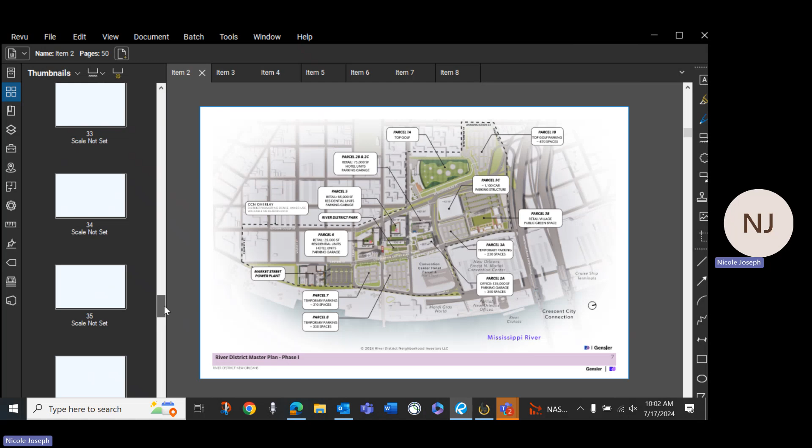This was in last month's presentation, showing the existing convention center promenade at the convention center and how we're trying to continue that promenade across the Riverside parcels of Convention Center Boulevard, down through the River District, and hopefully extending all the way to the power plant. Let's go to the next slide.

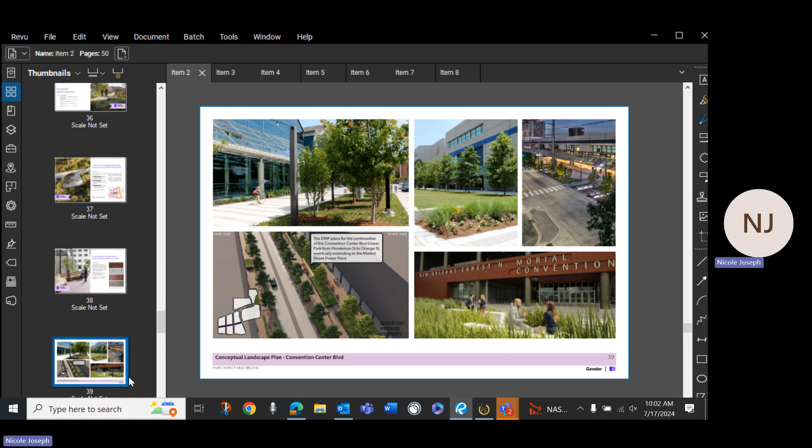This starts to delineate that a little bit more. We were asked to show this because we don't necessarily know specifically what's going on in each parcel. We have a general idea of a conceptual plan, but it really depends on what developers come in to do for each individual parcel, so we provided conceptual plans.

For example, in the top right, that's looking at Convention Center Boulevard between Henderson and Euterpe. We have a 72-foot right of way, and on the lake side of Convention Center Boulevard, a maximum setback of 25 feet and 15-foot minimum, which is what the office building is providing. You can see the office building as the small white box in the top left corner. On the riverside, where we're trying to continue the promenade, there's a minimum setback of 30 feet and maximum setback of 50 feet.

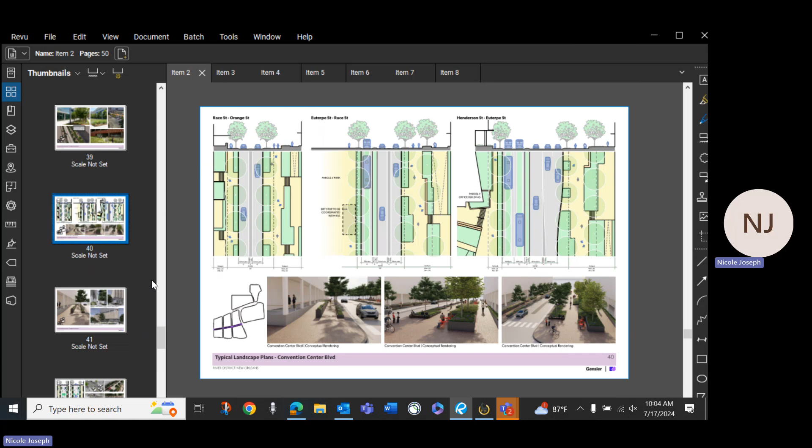You can see that continuing in the second diagram in the middle, on the riverside between Euterpe and Race, and then continuing in the last diagram with the same 30 to 50 foot setback from Race to Orange Street. I want to go to slide 42.

So this is looking at Race Street and Euterpe Street. Again, these are typical plans. Obviously with Euterpe, we know what's happening with part of it, with parcel 2A where the office building is. But again, trying to show the conceptual plan, working with Wes Michaels and SMM on developing these.

To show what we're planning for throughout the district. Where we have parallel parking, shared lanes on the river side of Convention Center Boulevard. We have a BRT lane because the BRT will route down from the overpass, down and around in front of parcel 2A, in front of parcel 5 where the park is, and then around and back up to downtown or across the West Bank. You can see the shared lanes there as well.

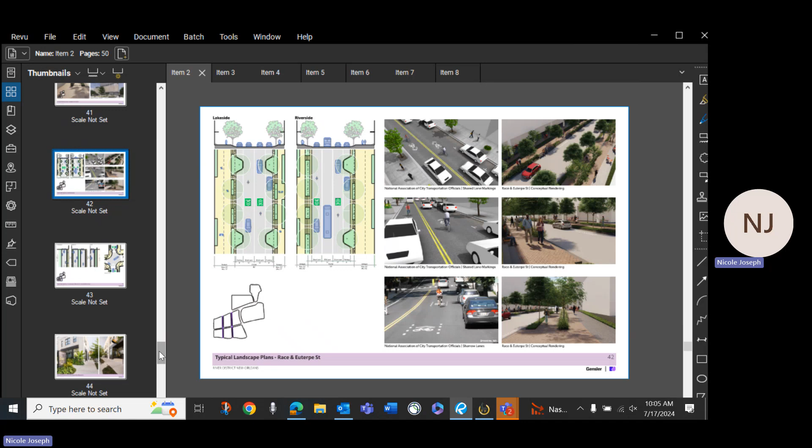We want to jump to slide 43. This is looking at the outskirts streets. So you have Tchoupitoulas on the left and Henderson in the middle, and then Front Street on the right. Most of these are determined. Henderson was already determined that we're not making adjustments to that, maintaining the same right of ways that DPW has had previously. Same with CHOP.

And then with Front Street, we worked in coordination with the U.S. Army Corps of Engineers to determine their setbacks required for the wall, and then providing more of a service lane on Front Street, so that for different loading for those parcels on the river side of Convention Center Boulevard.

We were also asked to look at a typical intersection, which is on the top right, to show where crosswalks are, to ensure that we're providing ADA accessibility. So we have the ramps for those.

And then here we see the shared lanes. This is, for example, at the intersection of Convention Center and Race Street. So you have the shared lane of Race Street, the bike lanes, and then you have the BRT routing down and around, which is going in between parcels 7 and 8 on the bottom. So that's really the only adjustments we made to the presentation from last month, trying to provide additional information.

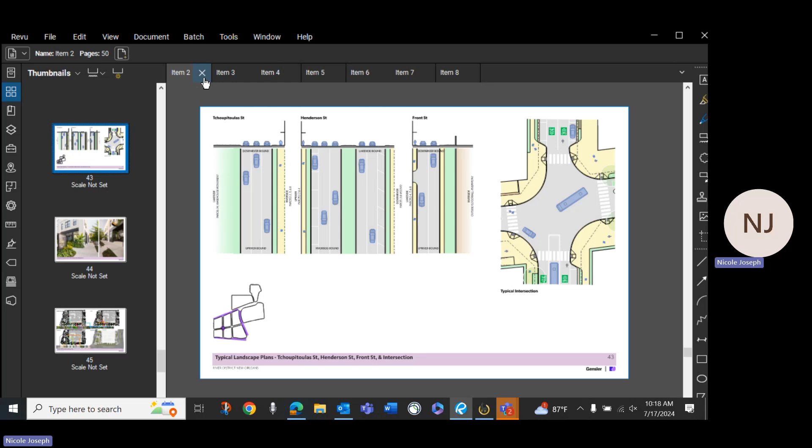Okay, so the next item on today's agenda is consideration of Design Review 624. We have Sarah as the map person, and she'll give a brief presentation, and then the applicant will have 10 minutes to present.

Yes, can you switch to item 3, please? Actually, can you go to page 25? Thank you. Were they submitted? Actually, a few weeks ago? We received them July 6th, I believe. Like the 3rd. July 3rd. So in the agenda link, to the page.

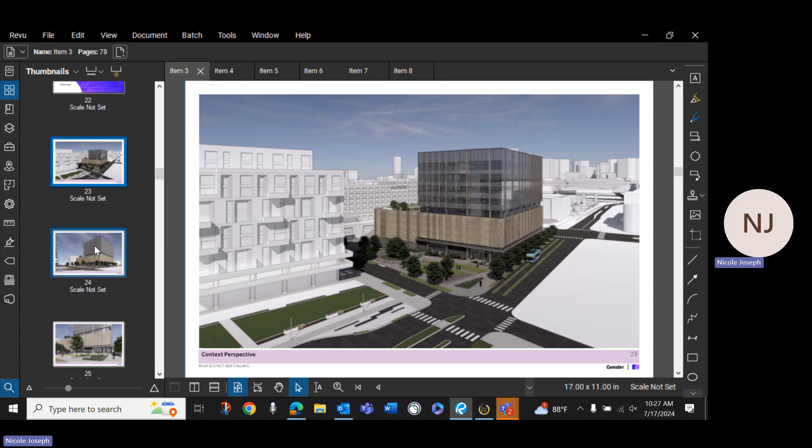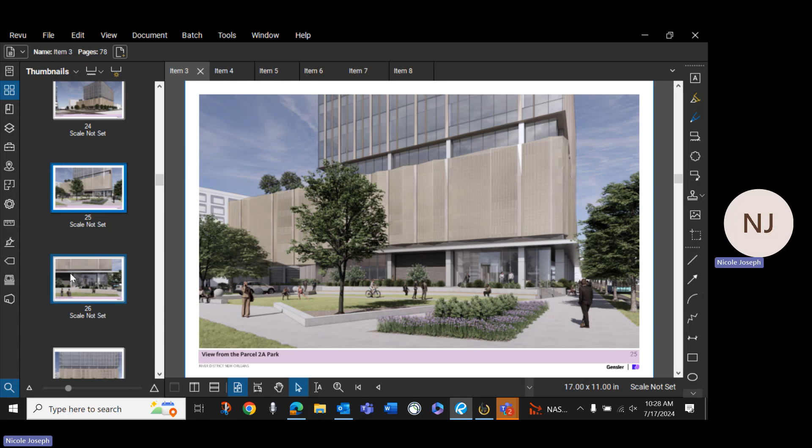The other comments we tried to address regarding the design characteristics of the building: there was concern that the building felt too contemporary for New Orleans, concern about the amount of glass not feeling as much New Orleans as past precedents, a comment about it feeling too glamorous for the River District, and concern over the original design of the garage screens feeling flat and lacking texture.

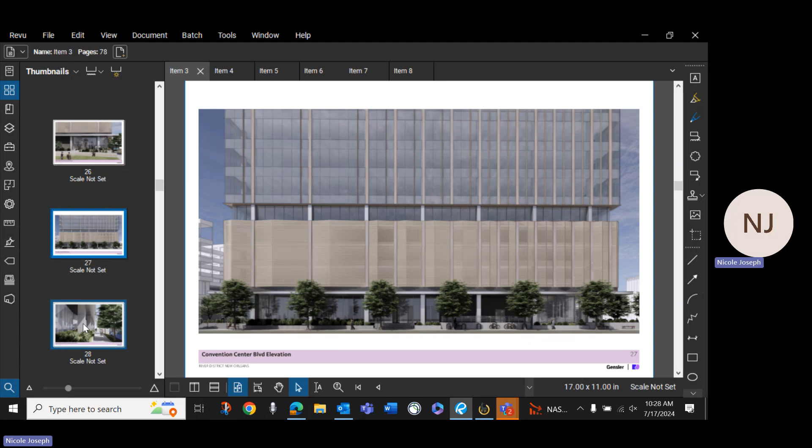I think a lot of that had to do with the way the renderings and the distances they were shown from the building felt very flat with no texture. So what we tried to address with those comments was new renderings that really illustrate getting closer to the building, and we've brought samples of what that material is like for screening the garage.

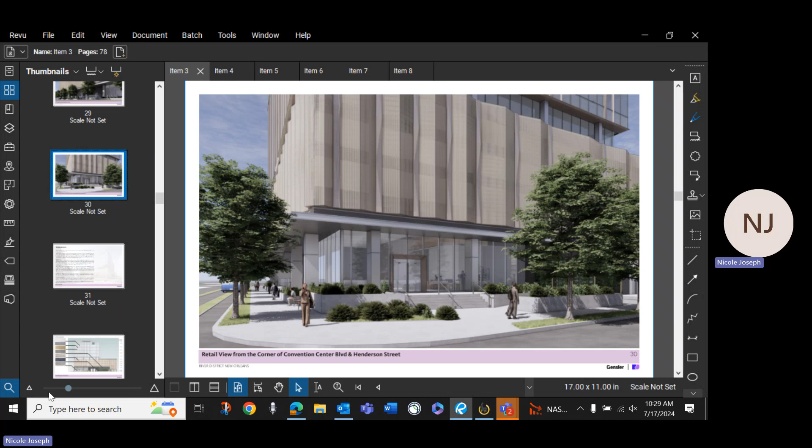In order to address the flat aspect of the parking garage, one of the things we looked at, and ran past the manufacturers of the product, was whether there's a way instead of having it be flat, to have it move and pick up on some of the themes of the building above. So we've gone through the garage design and redesigned it to actually have movement.

This slide is also part of a new section in which we provide precedent studies of the river district, the current context. We also show the immediate context of the future, specifically around where parcel 2A is going to be located, with additions to the convention center being proposed and planned by other architects, as well as directly adjacent across the street to the museum being proposed by EDR here in New Orleans.

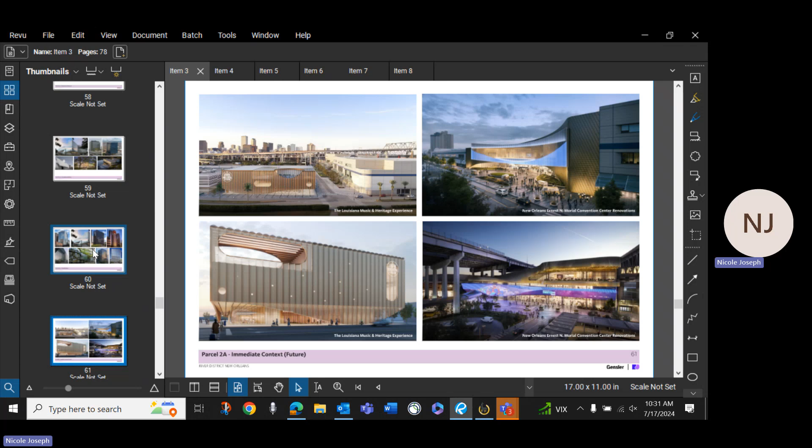There's also a section on glazed buildings within New Orleans where we feel that, while it isn't a huge typology, there are precedents within the city that are predominantly glass, from more modern and postmodern to more contemporary, particularly some of the new buildings like on Tulane's campus. So within this we've provided different precedents.

And then at the end there are also precedent examples which the development team has referenced and looked at from previous cities that have done successful developments like this. Those two being the District Wharf in Washington, D.C., which has this blend of rustic and modern warehouse-type buildings and more contemporary office buildings, and the other precedent is the Seaport District in Boston, which is again a very similar concept.

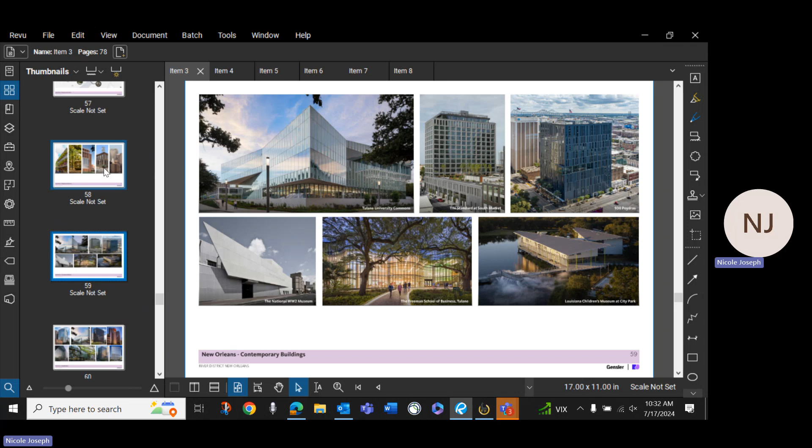So we've provided all these different examples as an addendum at the end of the package, and hopefully that explains our point of view for the district.

We were under 10 minutes. But thank you.

I would open it up to committee discussion, and one thing I'm not sure you kind of pointed on was some changes to the upper floors to kind of add some banding.

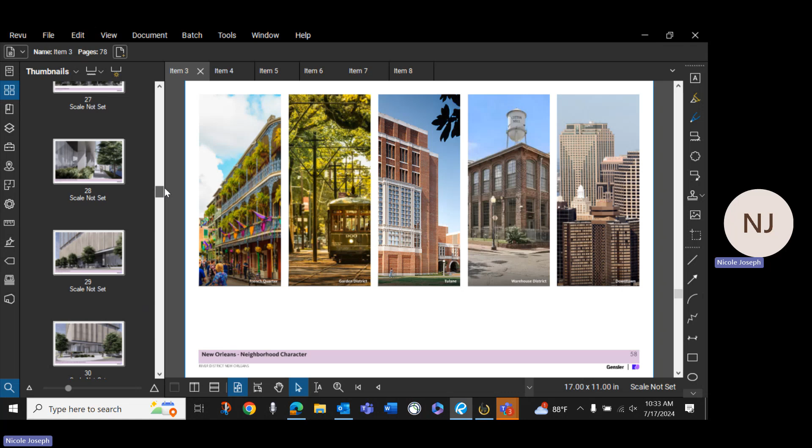There's nothing, we haven't really adjusted the upper floors, but there is a slide that speaks to our interpretation of what was driven by the design guidelines and how we feel like we meet the intent. With an office building, a Class A office building, the market is really looking for flexible design, and the glass box gives you the most flexible. There is a little bit of articulation, materiality, and decorative elements to it.

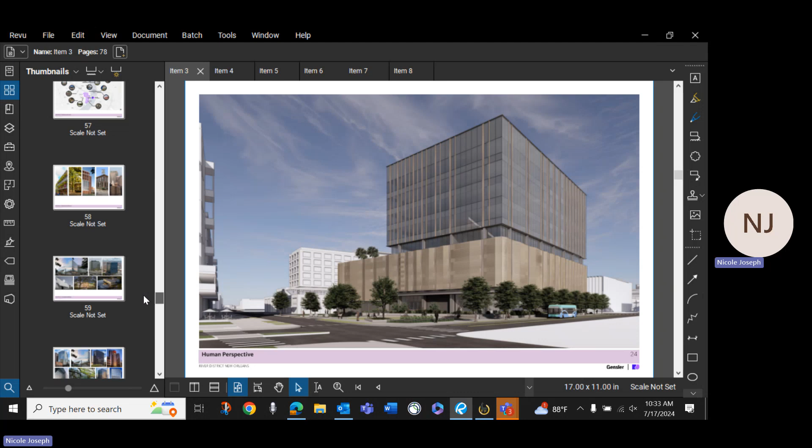But if you go to slide 69, the specific language in the design guidelines is about articulating building mass with hierarchy, rhythm, and material transitions. This slide was indicative of how this building is doing that, both horizontally across the facade with a gradient that expands and compresses, and vertically in terms of the pedestrian level, the parking level, the amenity level, and the office, using offsets to accentuate the experience at the ground level and the break in massing from the parking podium to the glass office above.

Let me ask you a question. I read these red vertical lines and blue vertical lines as the kind of rhythmic scenario you're trying to present. Are they actually fins that move up above the roof line, or are they just illustration of the rhythm you're following? It's just illustration of the rhythm we're following.

In this section, the blue line indicates the 30-foot structural grid of the building. At the amenity level and the pedestrian level, the columns are exposed on the exterior, but behind that are the faceted metal panels that cover those columns on the glass portion of the building—those are indicated by the blue. The yellow and the red follow the 5-foot grid typical on an office building across the facade. The blue is the faceted panels at the columns, but the red is actually a vertical fin, a metal panel matching the flat faceted panels.

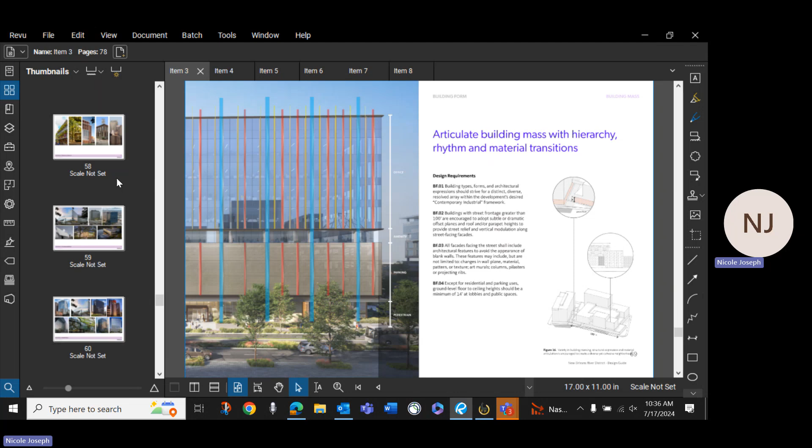Yeah, right there on the bottom right corner, you have the same metal screening, kind of coloration, that sort of begins to show a wave—it begins to enunciate some of your cultural experiences in that context.

I know a little bit of the history of New Orleans, and that is dangerous. Looking at the location where this building is supposed to be and the history of it, is there some way you could use something similar to make an artistic rendering of that heritage and legacy that is part of New Orleans? I'm just voicing an opinion here, and I'm thinking there is an opportunity.

Yeah, and I think we're trying to do that. It's not quite as pronounced as in this photograph of Chicago—it's very subtle.

Yeah, and Chicago, unlike New Orleans, has a very dark, gray sky. So you're not going to see the subtlety as much as you can see the brighter colorations, because that's the contrast you're working with.

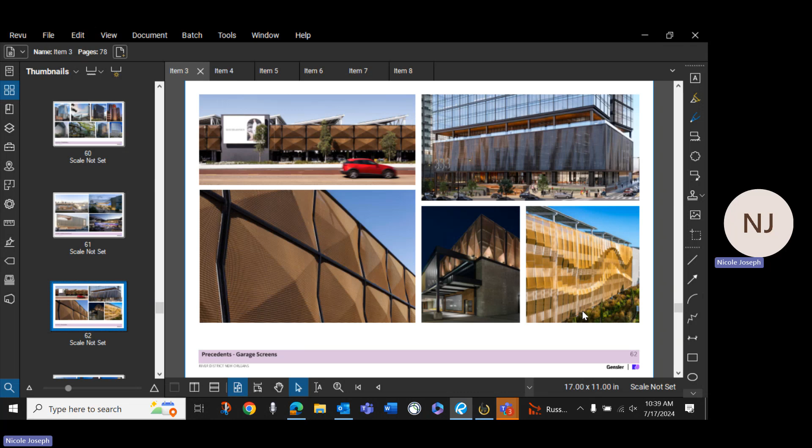Well, this particular building in Chicago is obviously inspired by wind, the Windy City, the movement of wind. That is a different system.